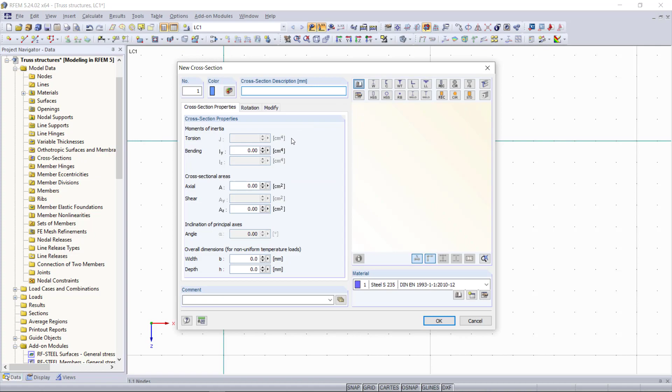So we will begin with modeling the first truss with individual members graphically. The first step will be defining a new cross-section in the material. Let's say we choose this time an IPE80 and as material steel S235.

Then, as usual, we will set a new member and start modeling our truss graphically. So before we do that, I'd like to have a look at the member type to explain how a truss member is defined in our programs, RFEM and RSTAB. In one of our previous tutorials, I've shortly explained it.

So until now, we mostly use the beam as member type, which transfers all internal forces. It's a fully fixed member without any member hinges, and this is still what we need for the upper and lower chords of our truss.

Then we have several other options for member types, and we can find a truss here. And a truss is defined as a beam member, but with automatically applied moment releases. So a truss is a beam with member hinges on its member ends.

And this is great for all of the internal members within our truss, like the diagonals, because we don't have to define member hinges manually on each member end anymore.

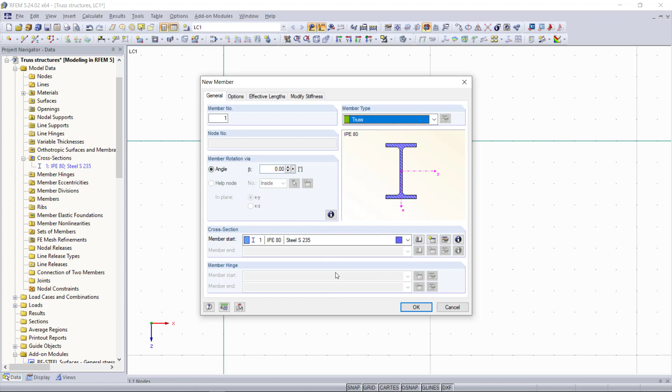But first, we will begin with the upper and lower chords with the standard beam member. So our truss will have a total length of 6 meters and a height of 1 meter.

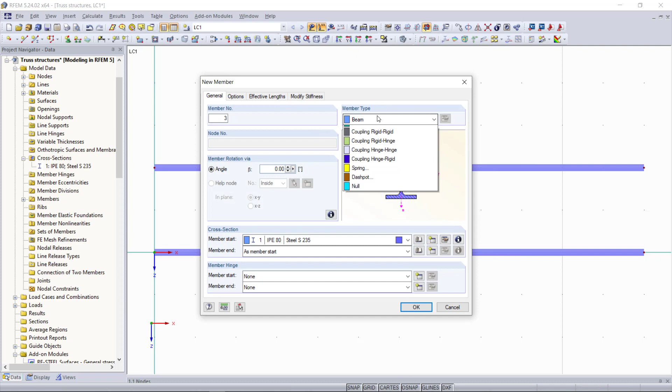And now for all the remaining members, including the diagonals, we will select new single member up here again, and then we change the member type to a truss member. We will insert in total 6 diagonals, beginning in the middle with a distance of 1 meter in between. First this side and then the other side.

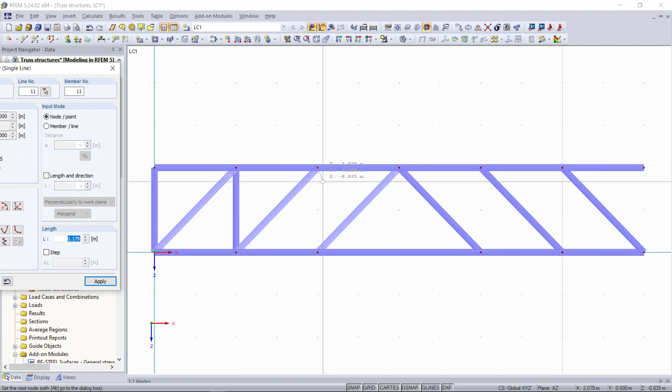Once done, next we need our 2 supports. We will have a hinged one at the start point, and the one at the end will be able to slide along the X direction.

Now, as we can see, our truss structure is finished, and we can start with our second example, which will be generating a truss automatically using the model generator.

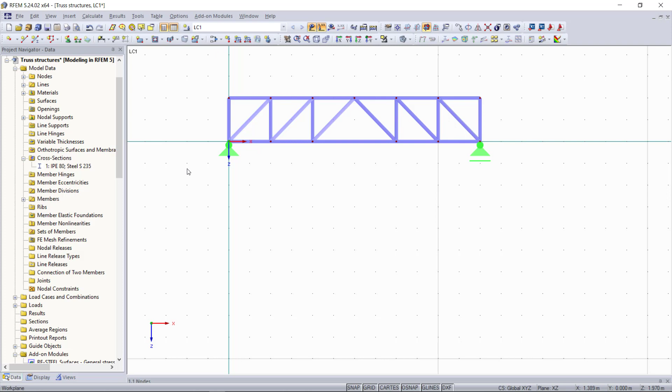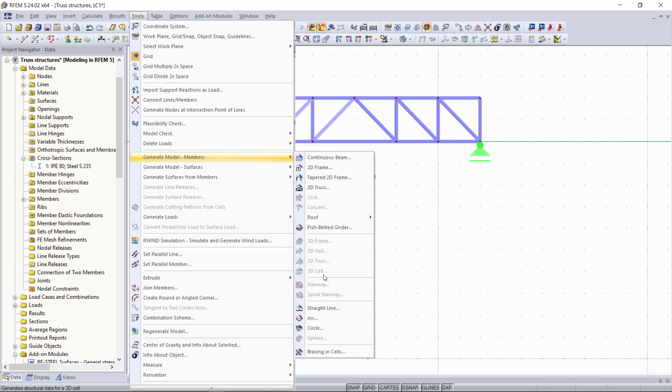First, we will create a new node, and this node will be the starting node of the truss later. Then, in order to generate any structure, we can go up here to Tools, and then we can find Generate Model Members. We can see that some of them are grayed out. This is because we are still in a 2D environment.

That doesn't matter for our example, because we will choose the option 2D truss here. Next, this dialog appears, and what we can do in this dialog is we can select here different truss types, we can set different directions for the diagonals, and then we can define the geometry and cross sections, member types, materials, and so on. So for our truss, we will choose the first truss type as an example.

For the diagonals, we will choose this one, according to our first example. And then down here we can see the final truss structure.

On the parameter, we can set the geometry of the truss. For the number of bays, we can type in 6. The total length will be, let's say again, 6 meters, and the total height will be 2 meters. The side height will be 1 meter.

Then we can determine the cross-section and member type. And we can see here the program automatically suggests us the member type. That's very helpful. For the upper and lower chords, a beam member is defined, and for the diagonals and verticals, truss members are set on default.

Since we only have one cross-section type, the defined cross-section is also set here automatically. And of course, we could simply change this by opening up the library or creating a new one. But for this example, we will stay with this cross-section that we also have for our first truss.

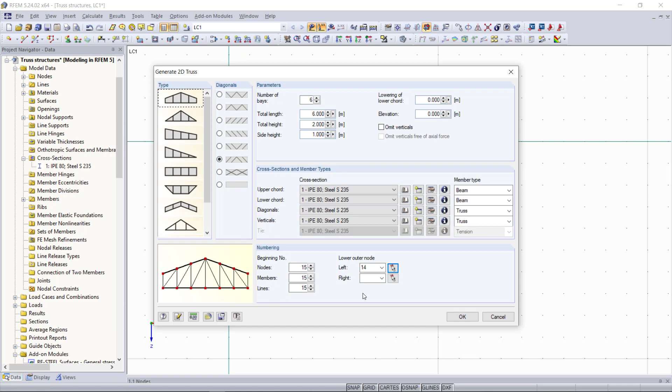Then we will choose the node where the first point of the truss will start. And now we can see the generated truss structure also in the graphical area.

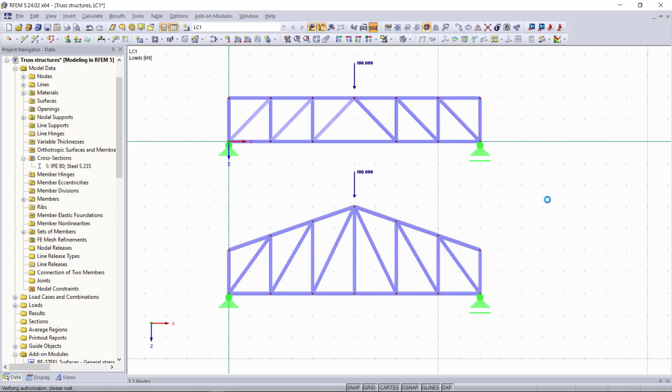Next, we will apply a point load of 100 kilonewtons in the middle of both truss structures. By clicking Calculate All, our results will be displayed as we can see now.